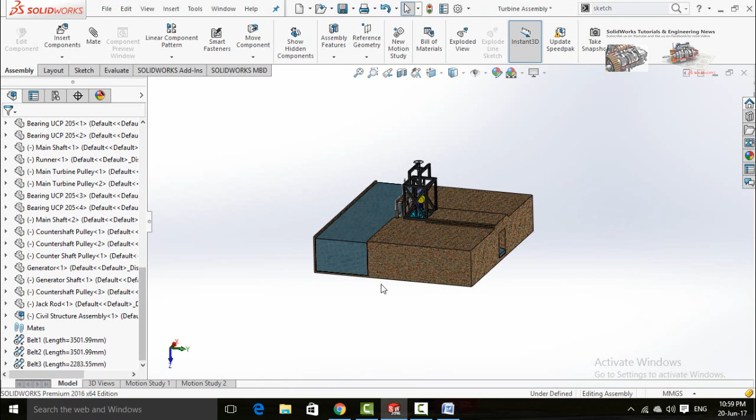How to open parts from assemblies. Basically this is a model hydropower system. This is the main canal and this is the link canal on which this hydro turbine is installed.

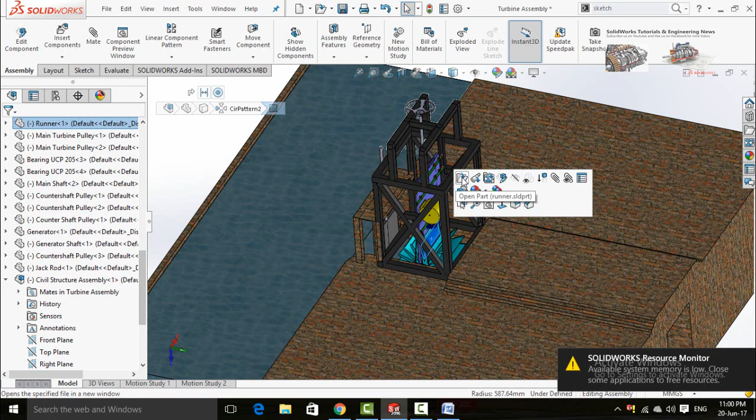So to open any of the parts separately, just click on that part. Let's click on the runner. Whenever you click on any part, a new option bar will appear on the screen. The first option is open part. If you click on this option, this part will be opened separately. You can view, edit or do any operation on it.

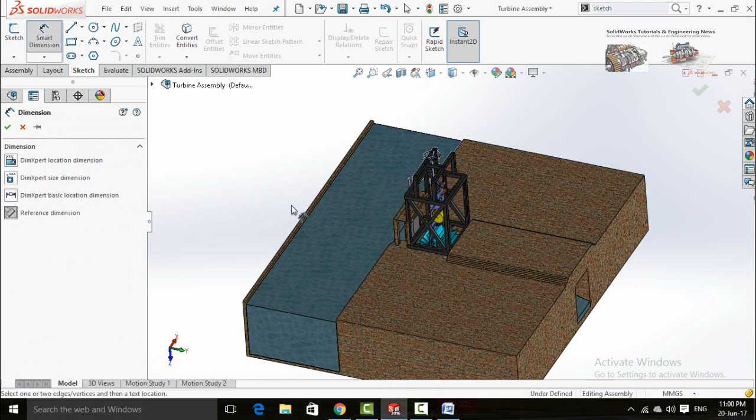Third one, how to measure different lengths. Open SolidWorks assembly. In the layout tab or in the sketch tab, you will find a smart dimension option here. Click on this option and then select reference dimensions. By using this command you can measure all dimensions in the assemblies.

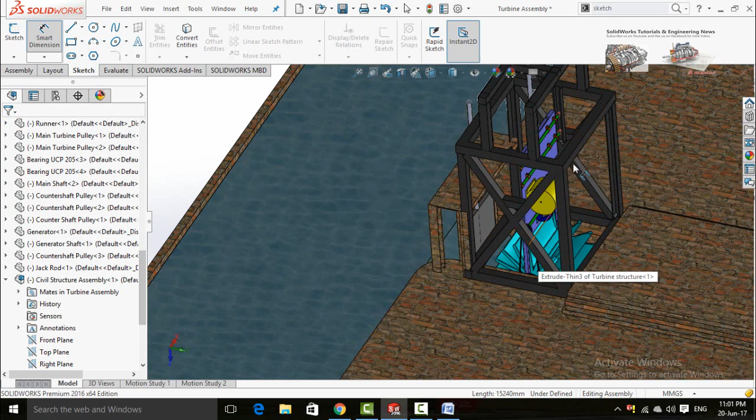Click on any line to measure its length. If you want to measure the distance between 2 points or 2 faces, just click on both faces like this and then this face. This dimension will appear. So this is in millimeters.

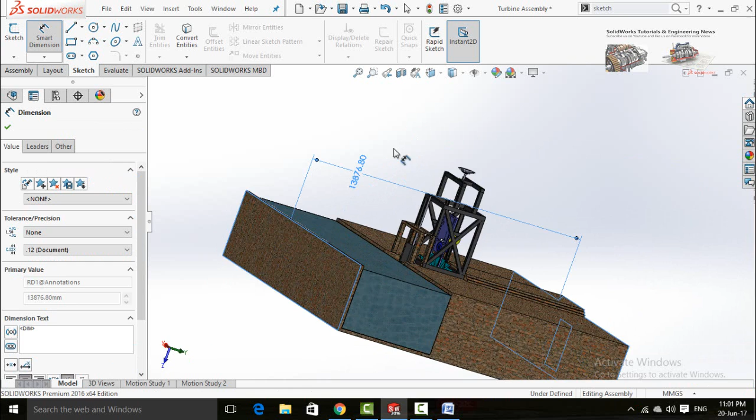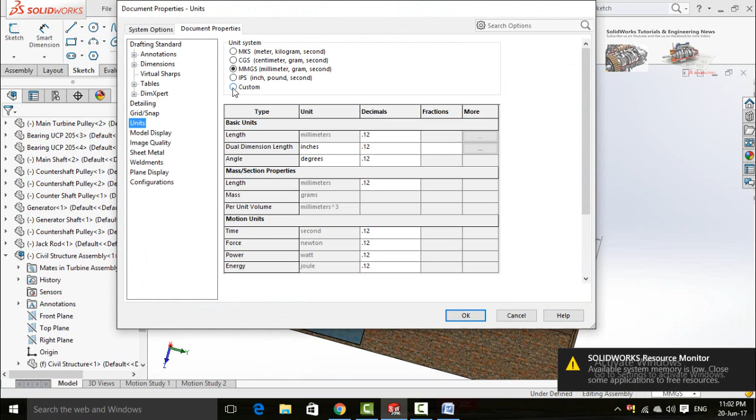If you want to change the unit system, in the right side click on this arrow and select inches, pound, seconds or any of your desired units. If you want to edit more settings, click on edit document set units, and then select from here custom length in millimeters or inches, miles, micro inches, meters, feet.

Let me choose inches. Now click on OK button. Now as you can see, the unit of this length has automatically been changed to inches.

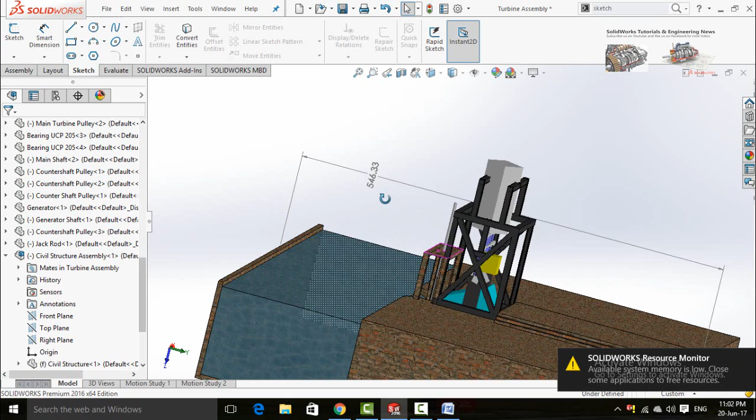Click on the dimension and press delete button if you don't want it. Same process is used to measure dimensions for the parts. Click on sketch tab and then select smart dimensions and don't forget to select reference dimensions.

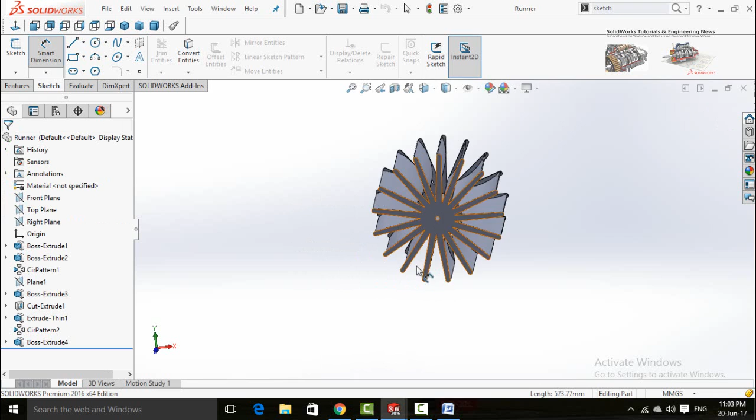Now you can measure any dimension by simply clicking on that length. Or if you want to measure the distance from this point to this point, zoom in, select this point, and then press escape button if an unwanted point is selected.

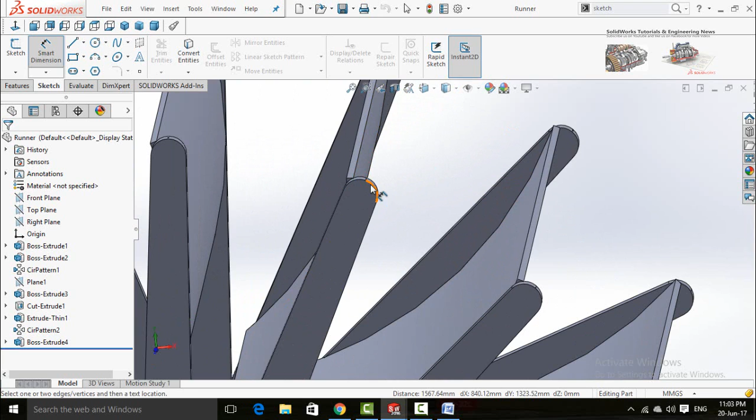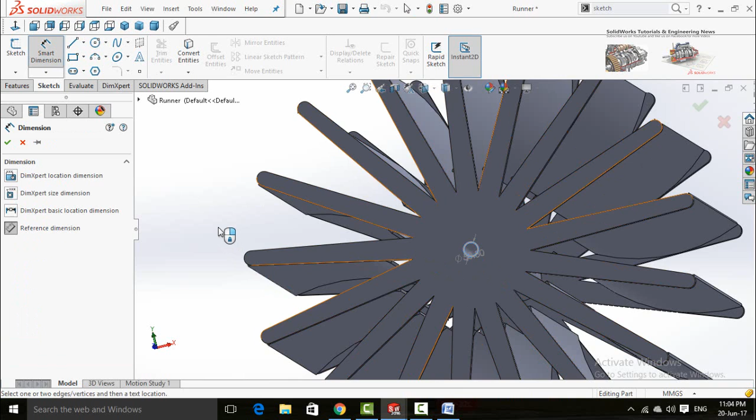In this way you can find all the dimensions manually. Again, smart dimensions, and then click on any circle to measure its dimensions.

Number fourth, how to edit materials. Open the assembly. If you want to apply PVC plastic to the runner, right click on it and then scroll down and find the material option. Here you can find material, and then you can choose any of the material from the list, or you can edit material manually.

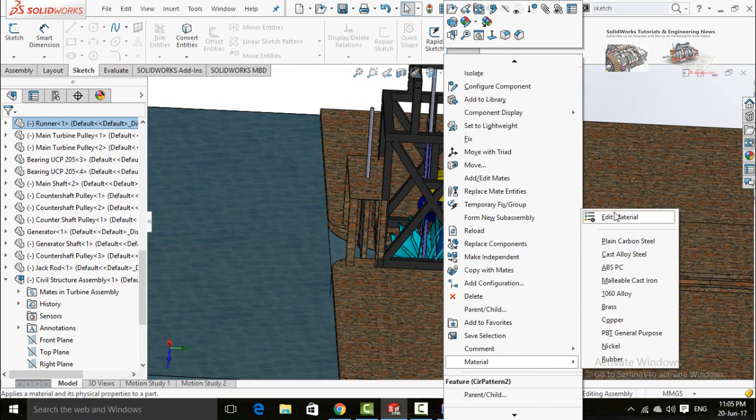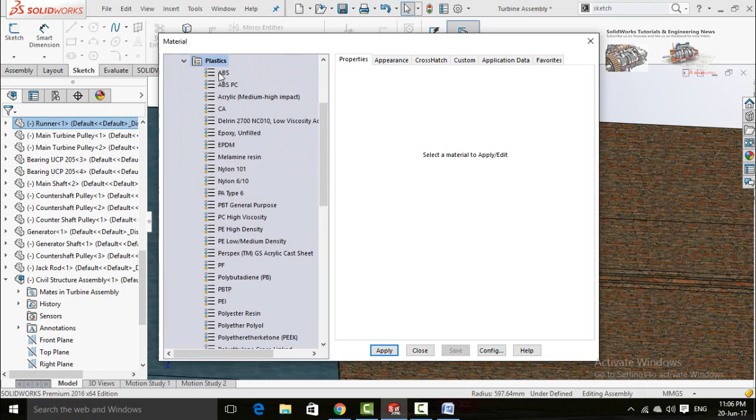Here is the complete list of materials: steel, iron, aluminium, copper, and for example plastics. In the plastic category, ABS, ABS-PC, and normally we use PVC plastic.

So here is the PVC plastic. Two types of PVC plastic. Select any of the material, and you can also edit the properties of PVC plastic from here. So we do not want to edit properties. Click on apply and then close.

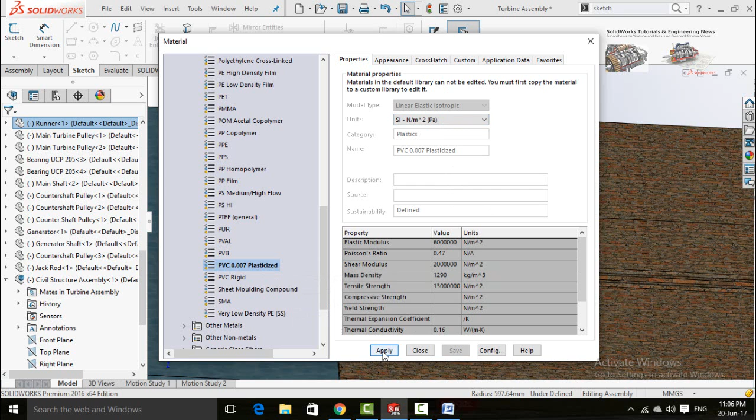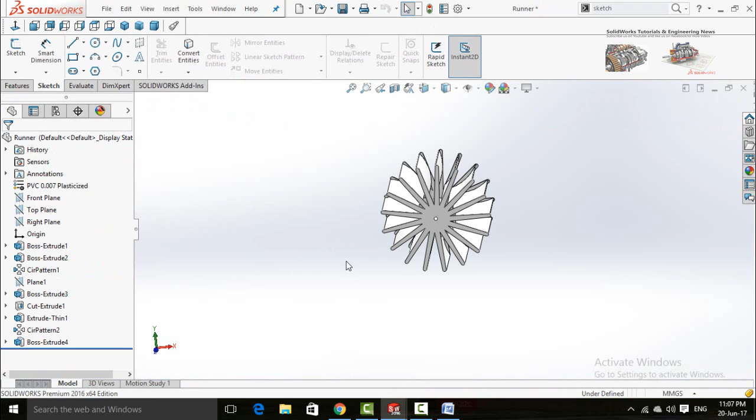Now, how to know mass properties. When you have selected the material for your part, click on that part, open it separately, and verify from here whether the material is applied or not. Now in the evaluate tab, click on mass properties, and here is the mass in grams.

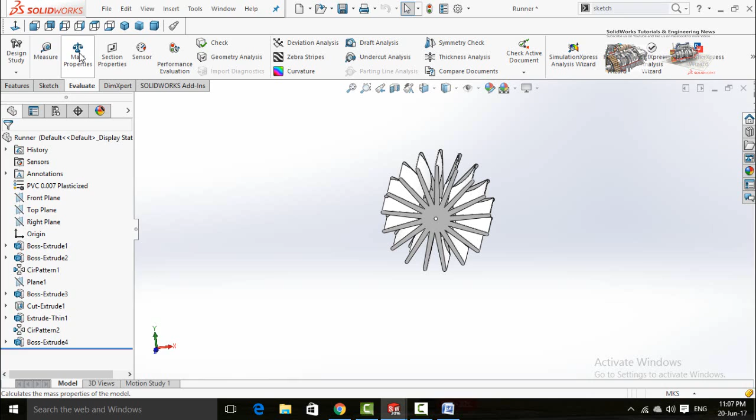For kilograms, click on this arrow and then select kilograms. Now again click on mass properties, and here is the mass in kilograms.

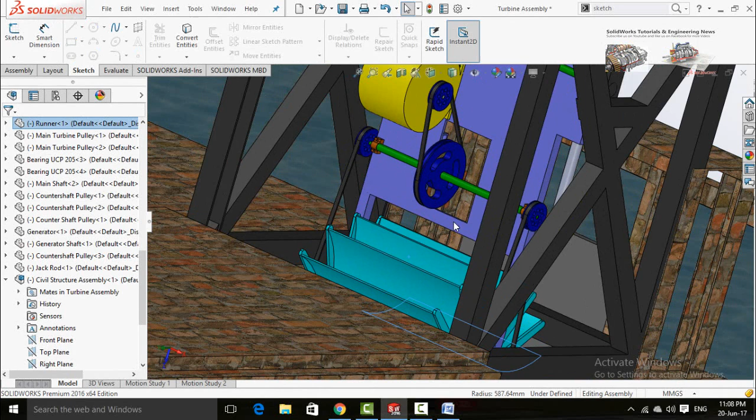Next, how to fix and float parts. You can move and rotate parts in SolidWorks, or you can also fix them. If I click and drag this runner, it will rotate, and all the parts which are linked with the runner will rotate along with it.

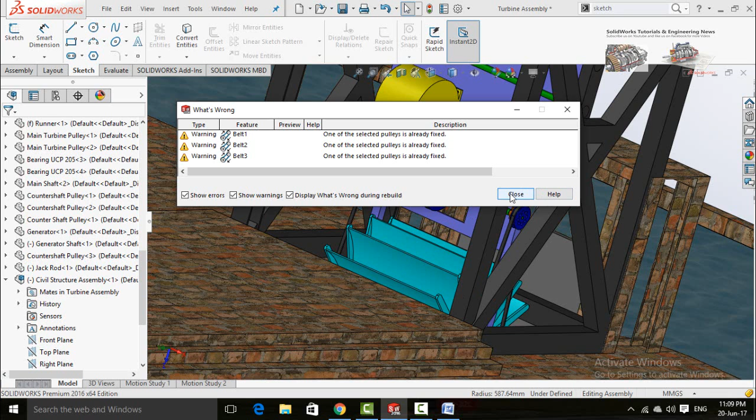So now I am going to fix it. For that, right click on that part and then click fix. Now the assembly is overdefined because this part should not be fixed. So for now I am closing it. Now this part is fixed.

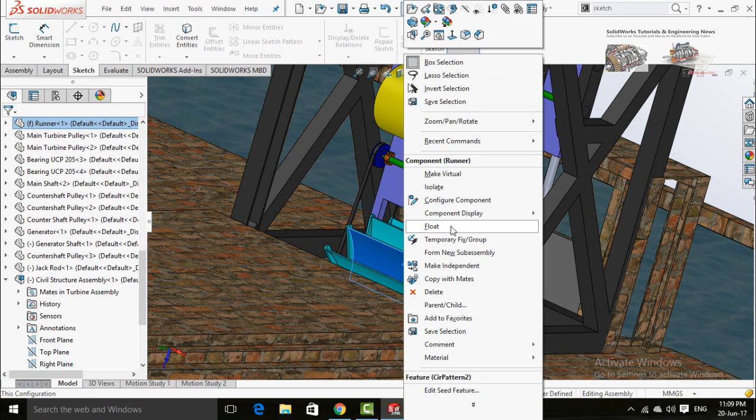If I try to rotate it, a message like this will appear and it will not rotate until I make it float. So again, to make it float, right click on it and then select float. Now try to rotate it.

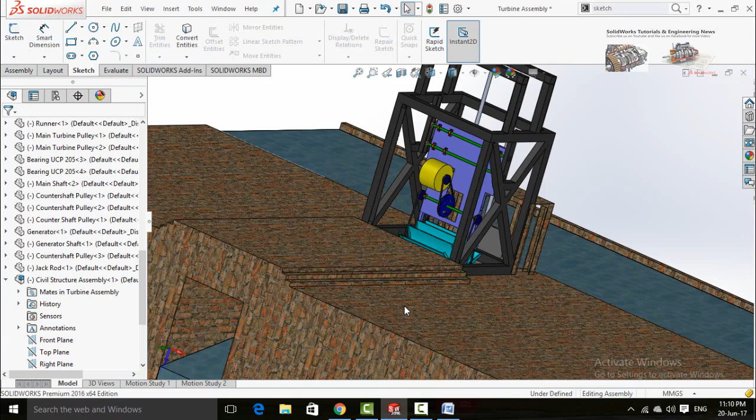Number 7, hide and unhide parts. So if you want to hide any part, click on that part and then select hide component. The part will be hidden.

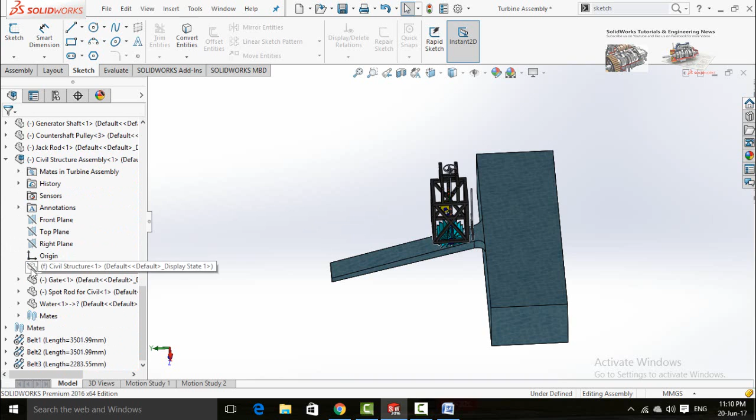To unhide this part, in the left side search for that part. Here you can see the icon is dim, it means that this part is hidden. So click on that part and then select show component.

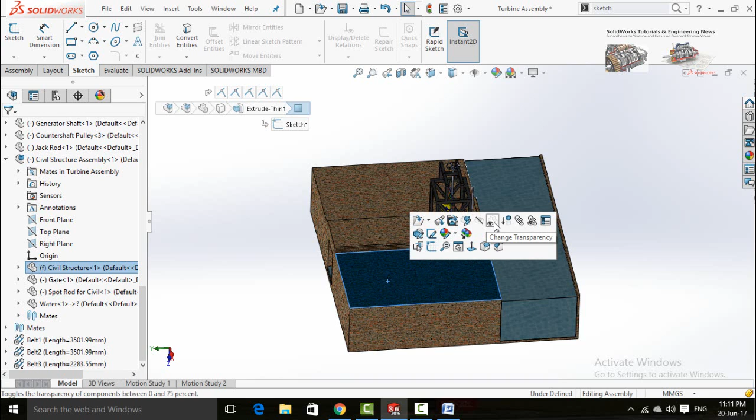You can also change the transparency of any part. For that, click on that part again, and next to the hide component option there is a change transparency option. Click on this, so this part is now transparent. To make it normal again, you can click on that part, or you can also click on that part from the part list and then click on the change transparency option.

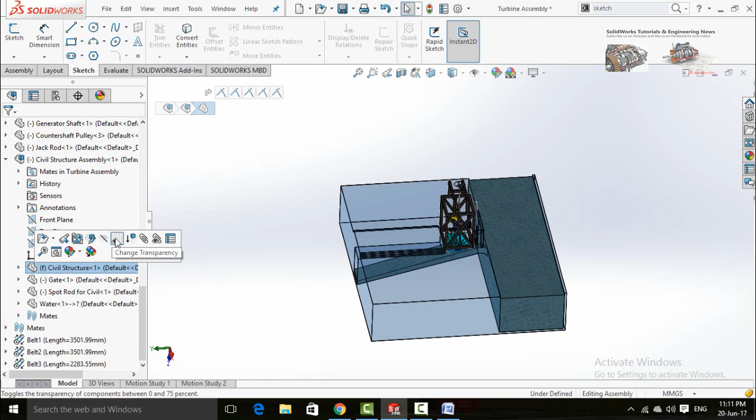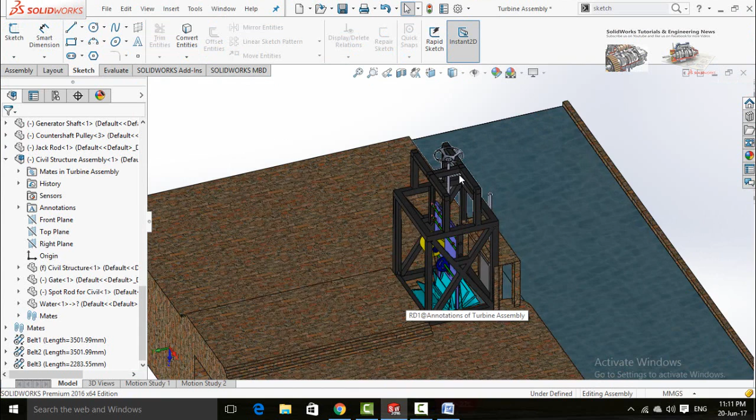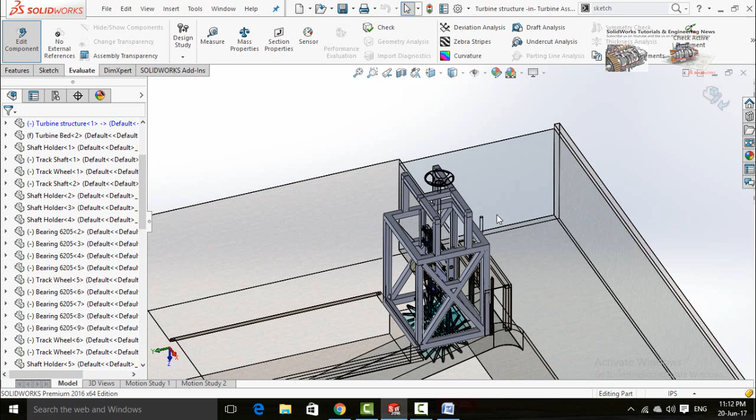Next one, edit parts from and in the assemblies. To edit any part, for example I'm going to edit this part. You click on this part and then select option edit part. Now you can edit this part inside the assembly, or if you want to edit this part outside the assembly, click on that part and then open it.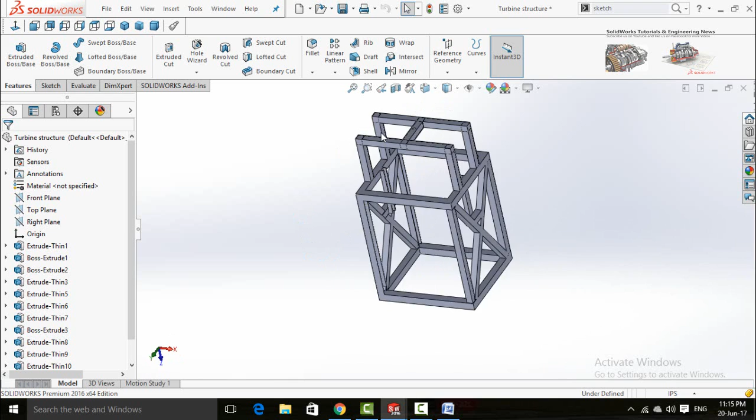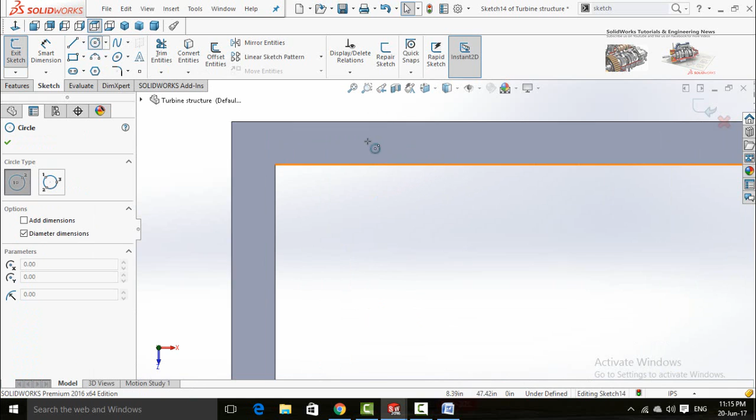You can edit it from here also. Now let's suppose I'm going to add a circle on this face. I want to add a hole on this face. Click on this face and then select sketch, then press this icon normal to, select a circle and draw it. Now click on smart dimension and then again click on the circle to define it. Insert your dimensions and then press OK button.

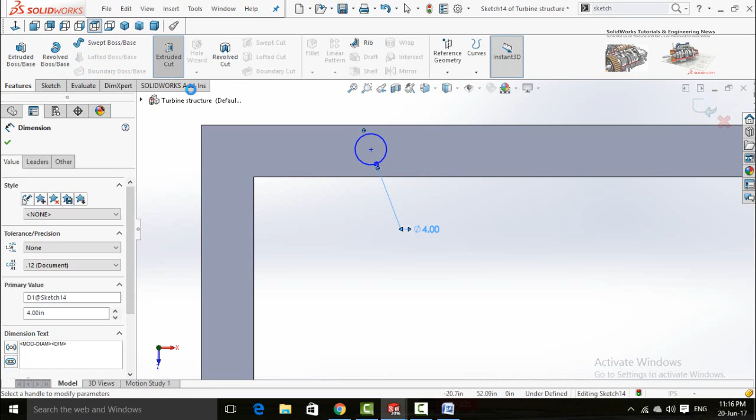In the features tab, click on extruded cut command. In the left side, here are a few options for extruded cut. For example, the length of extruded cut, let me write a 1 feet. Or you can also select through all or rest of the options. So press OK button.

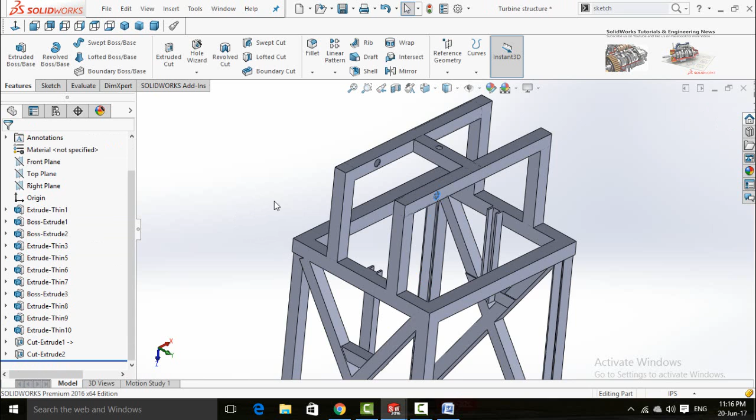So now this hole has been added to this part. When you close this part it will ask you to save the settings, click yes. Now assembly will be automatically updated.

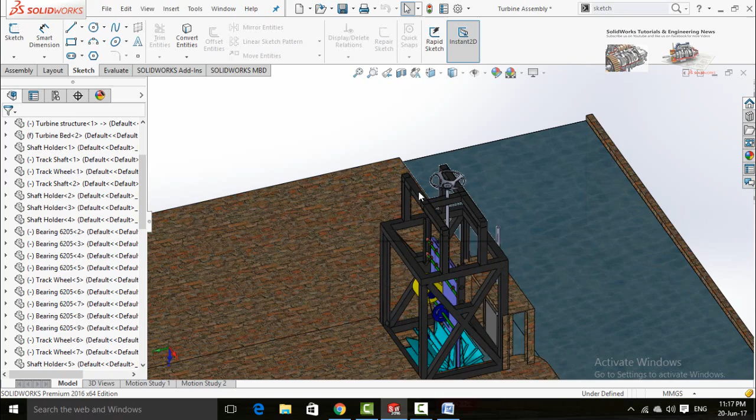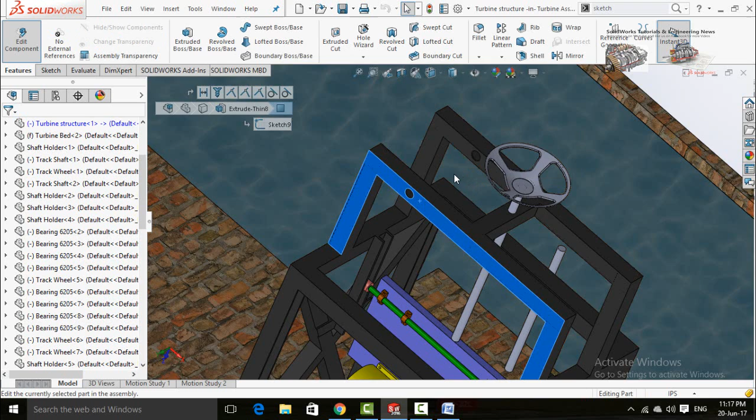You can see here the hole has been created automatically in the assembly. Now if you want to remove this circle or this hole in the assembly, click on the part in assembly and then select edit part. The writing in blue color shows that the part is now in editing mode. Scroll down and here is the history of all commands for this part. So in the last we have done a extruded cut. Click on this arrow.

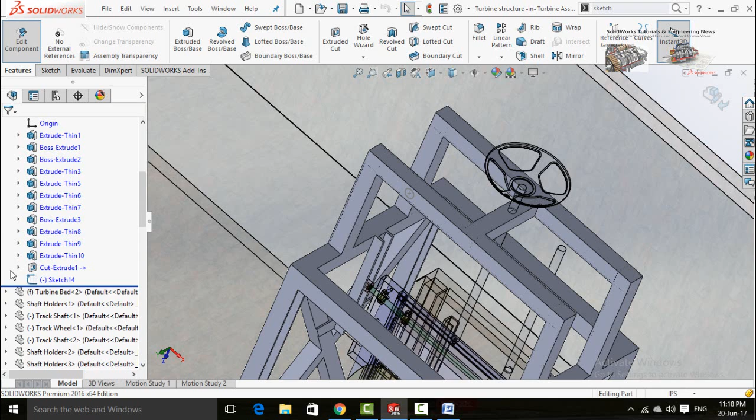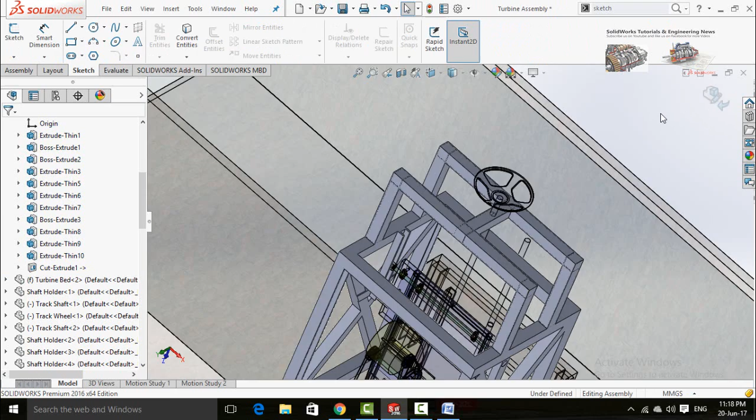First of all, right click on extruded cut and then delete it. And then right click on the sketch and delete it. Once you have done all editing, click on this button. I'm hiding these two parts.

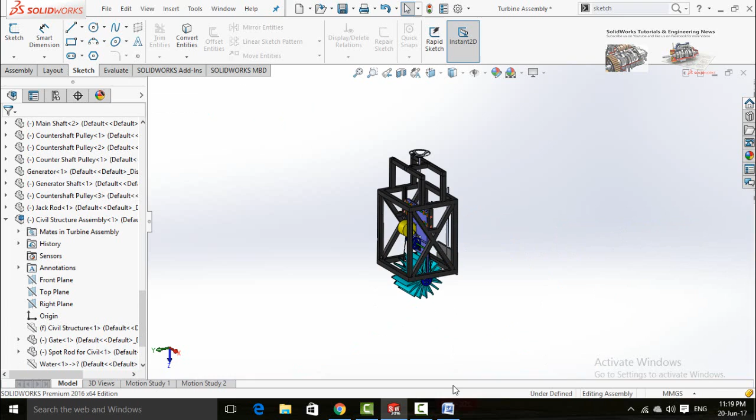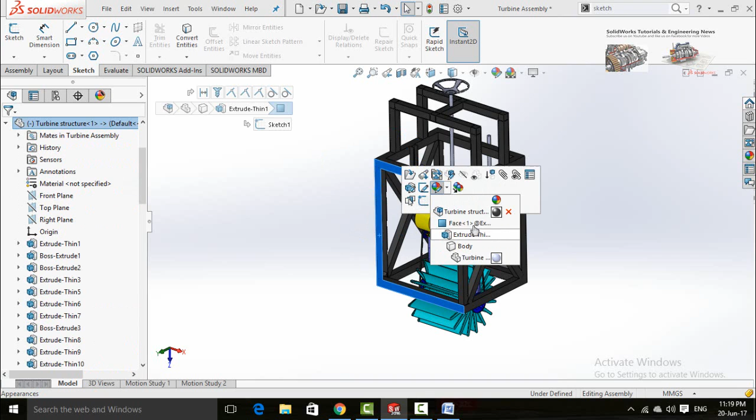Number 9. How to change appearance. If you want to change color or any appearance of any part, click on that part like this, and then here is the appearance option. Click on this arrow and then select the part. By clicking rest of the options like face, by clicking on the face, only the face will be changed.

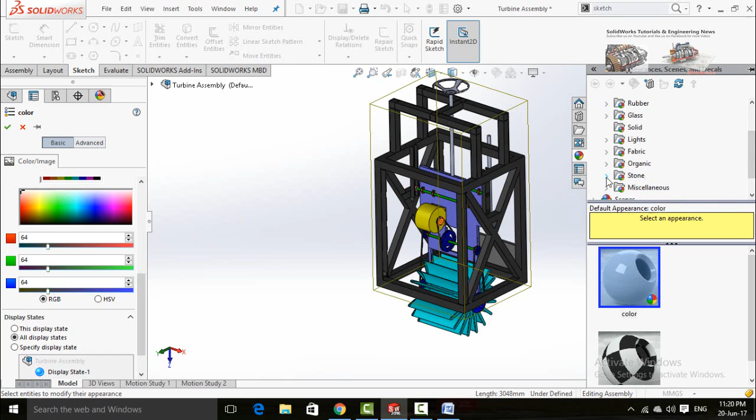Now I'm selecting turbine structure, the whole part. In the left sides there are only colors, but in the right side there are scenes and appearance. You can select any appearance like plastic, metal, painted, rubber, glass, stone. Let's select stone, and type of stones, bricks. Select any one and then automatically it will be applied to the part. So press OK button. So this was the way to change appearance.

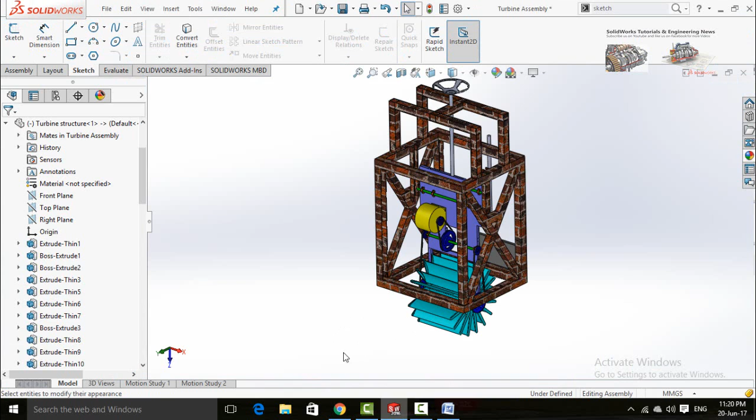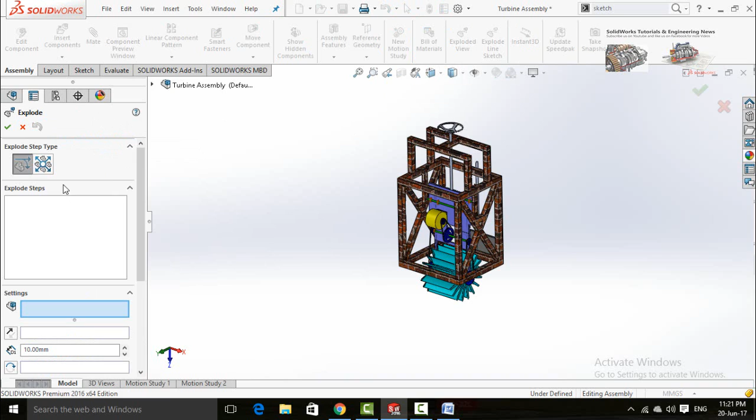Number 10th, how to make exploded views of assemblies. First of all, in the assembly tab, you will find an option exploded view. Click on this option, or in the configuration manager tab, right click on default and then select new exploded view. Now select all parts one by one and move them.

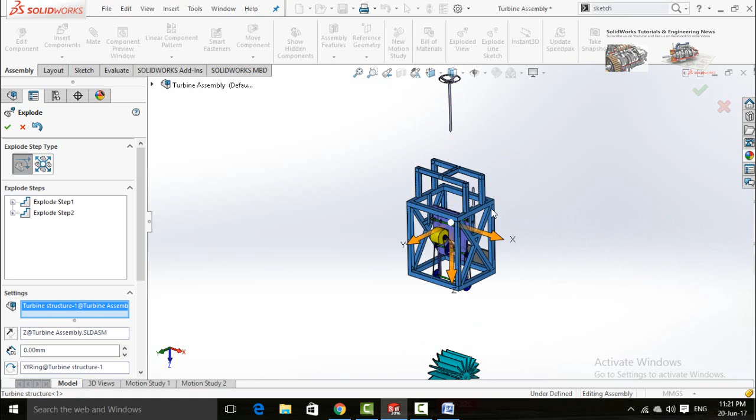These are the directions to move the part. Once you have completed your exploded view, click on OK button. Now again click on this arrow and then right click on exploded view 1 and click collapse. You can also explode it by double clicking.

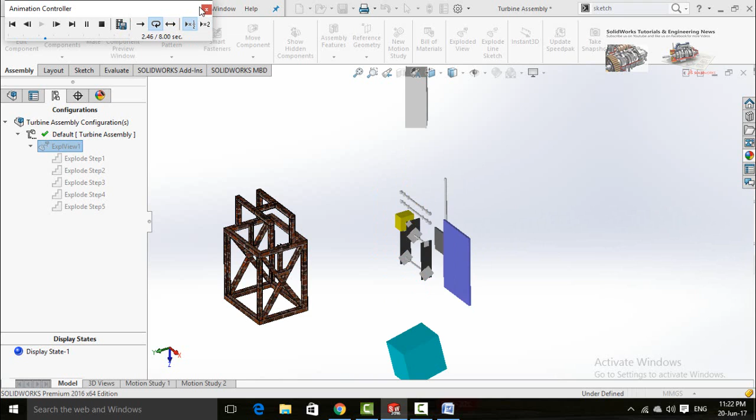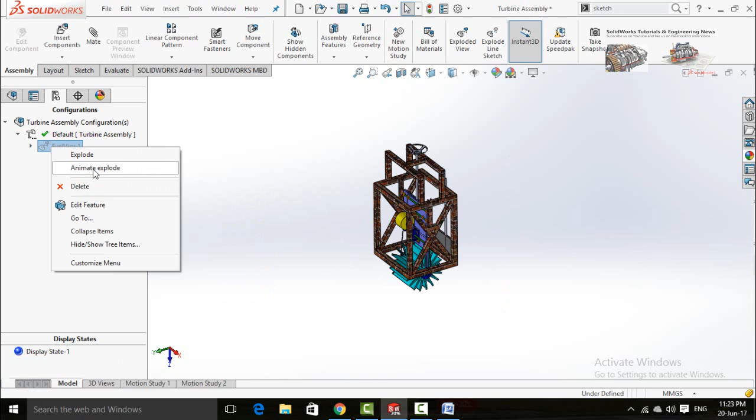If you want to make animation for explosion or collapse, right click and then animate collapse. Here is the speed for animation. So this was the collapse animation. For exploded animation, double click on the exploded view 1 and collapse, and then right click on it and then select animate explode. If you want to save the animation, click on this button.

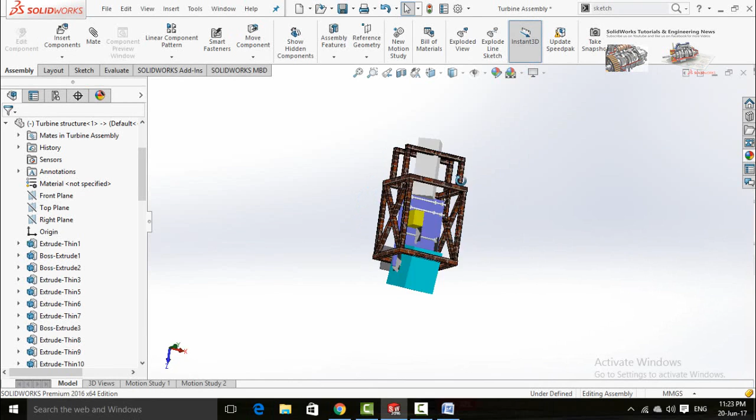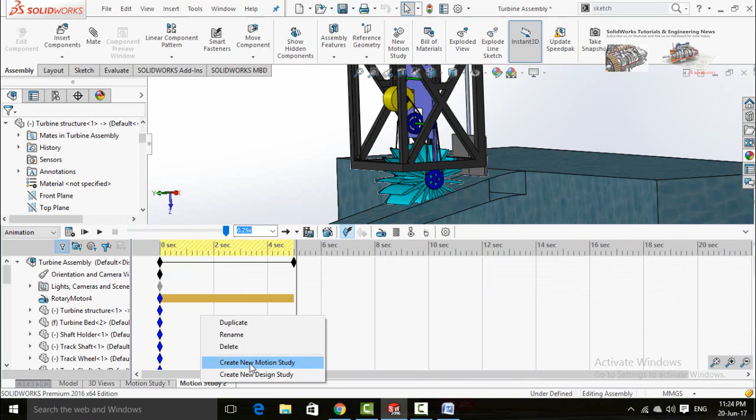Number 11th, how to make small animations. Select your view for animation. Next step, click on motion study 1, 2, anyone, and then right click in the empty space here and then select create new motion study. So motion study 3 has been created. If you want to rotate this runner, click on motor button here,

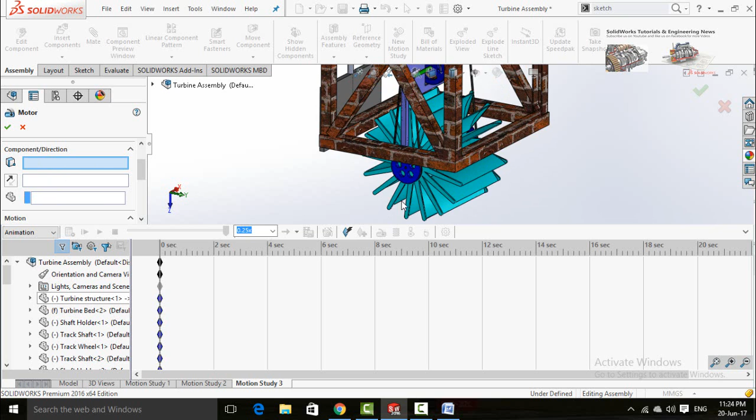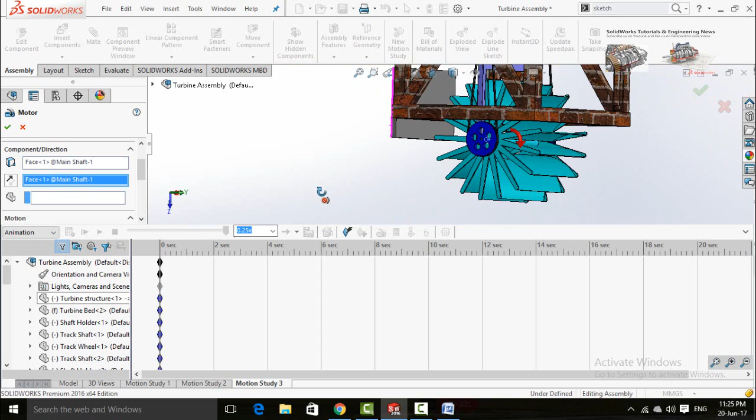Then it will ask you the origin or component for motor. Select the part which will be moving. I am selecting this shaft. This arrow shows the direction. If you want to change the direction, click on this button, reverse direction. Then scroll down. Few options are also here, counting constant speed, distance, oscillating. So we need constant speed. Here are the RPM, 10 RPM. Scroll down and then press OK button.

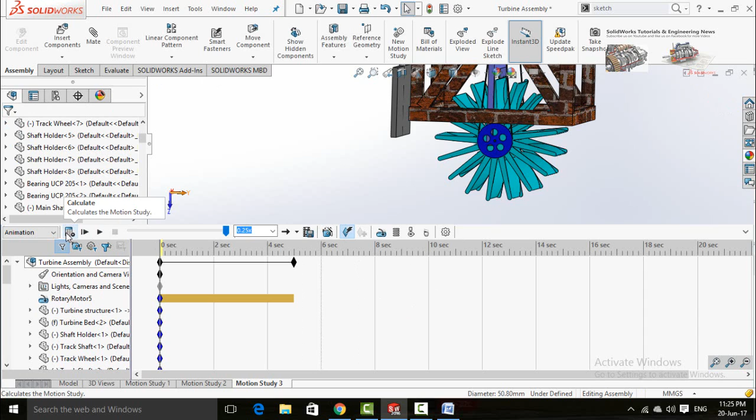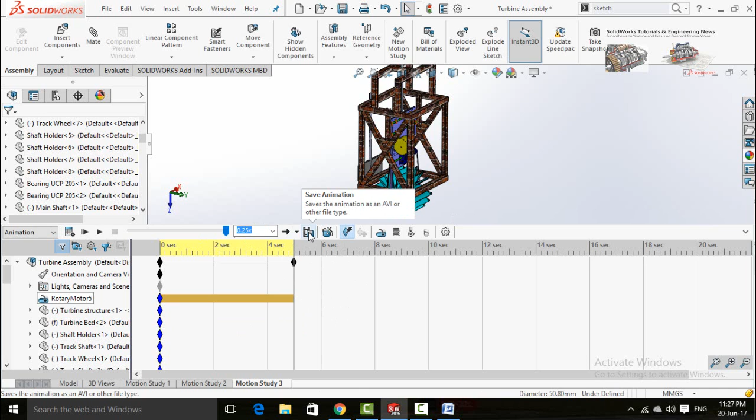Now click on this button, calculate. It will take some time to calculate. So this animation calculation on the animation has been done. If you want to save this animation, click on save animation and then from here aspect ratio, select 16:9 aspect ratio and then rename your assembly animation and then click on save.